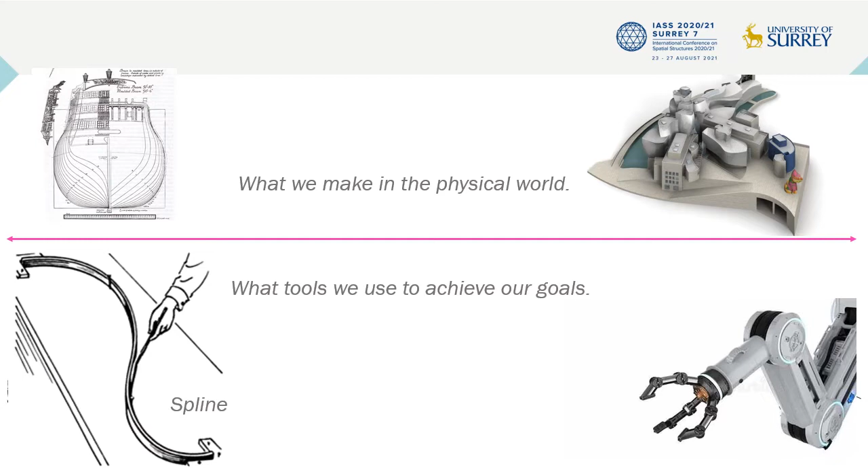I include shipbuilding because the tools shipbuilders used included a spline, a tool that had a significant impact on the invention of CAD systems and future automated tools. My timeline for building engineering begins in the mid-19th century, with Chicago claiming the world's first tall building. It had a modern steel frame, fireproofing, and elevators, all innovations from this period.

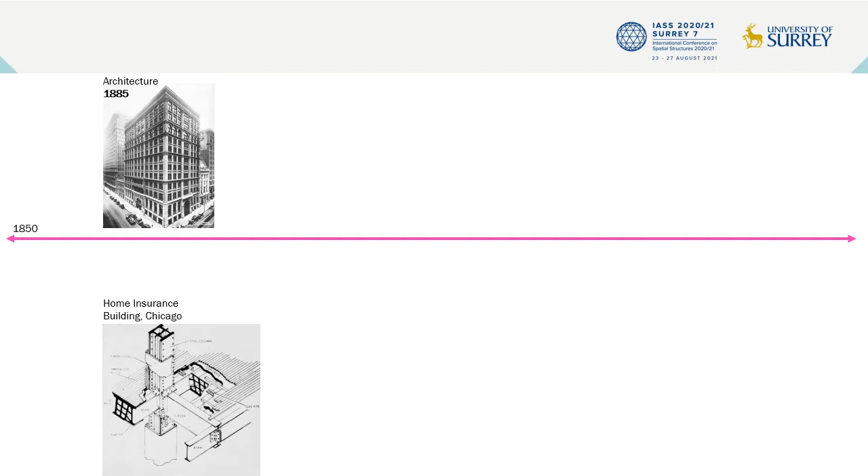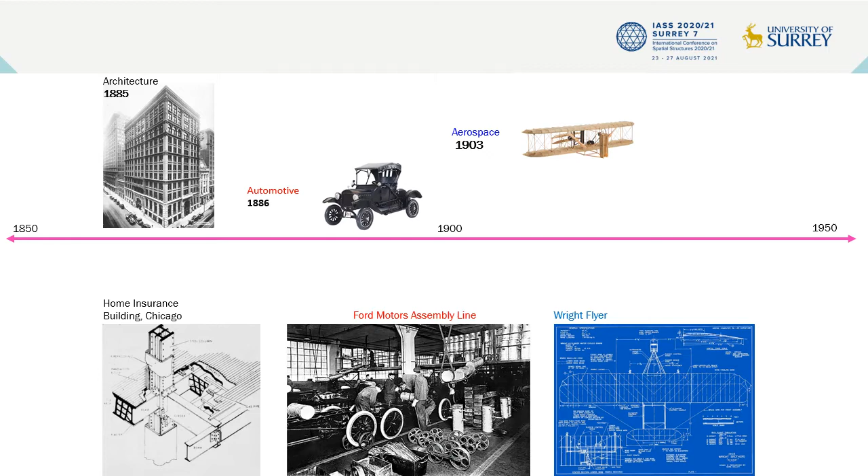Things got interesting in the engineering world as we entered the 20th century with the invention of automobiles and aeroplanes. Incredible innovation occurred over the first half of the century in architecture, automotive, and aerospace, while continuing to use hand drawings and calculations. The next 6 decades, from 1950 to 2010, is where there was tremendous innovation in computer-aided design for these fields, parallel with the development of semiconductors.

The origins of CAD systems in the 1950s begins in France with Paul de Casteljau and Pierre Bézier developing algorithms for the shipbuilder's spline and digitizing these in early computer programs. And Chuck Eastman at Carnegie Mellon predicts our BIM future in 1974 with his seminal GLIDE program. In 1992, Frank Gehry's Fish in Barcelona is the first BIM architectural structure. By 2010, we have extraordinary 3D tools like Revit, generative components, and Grasshopper.

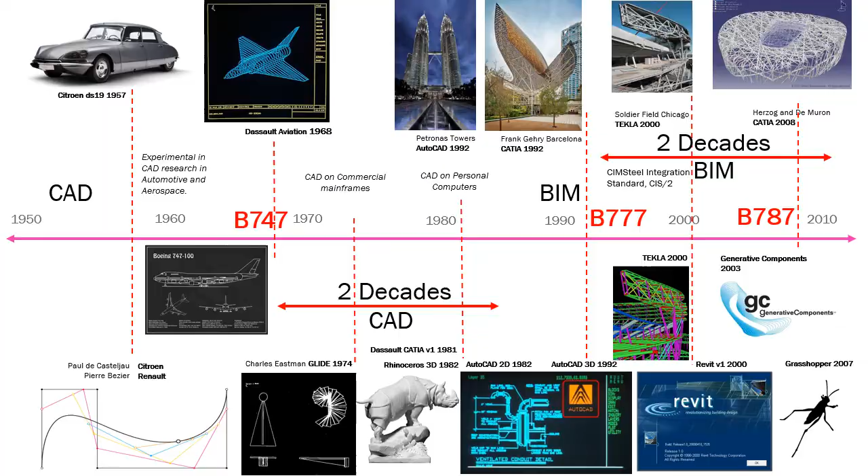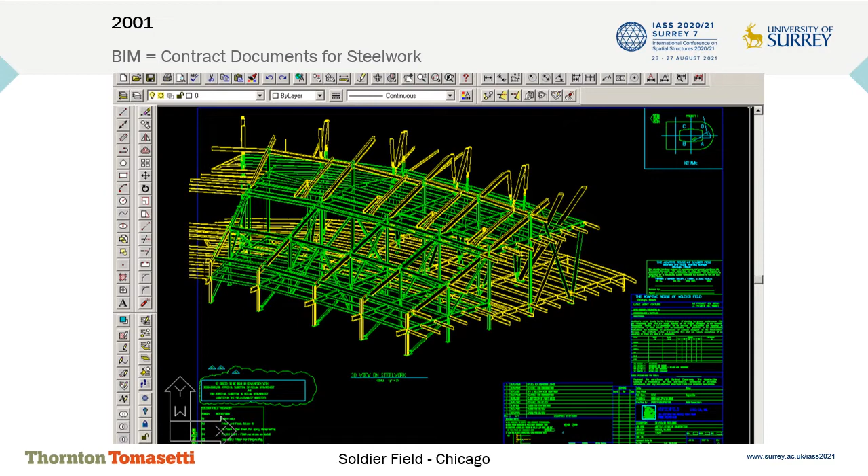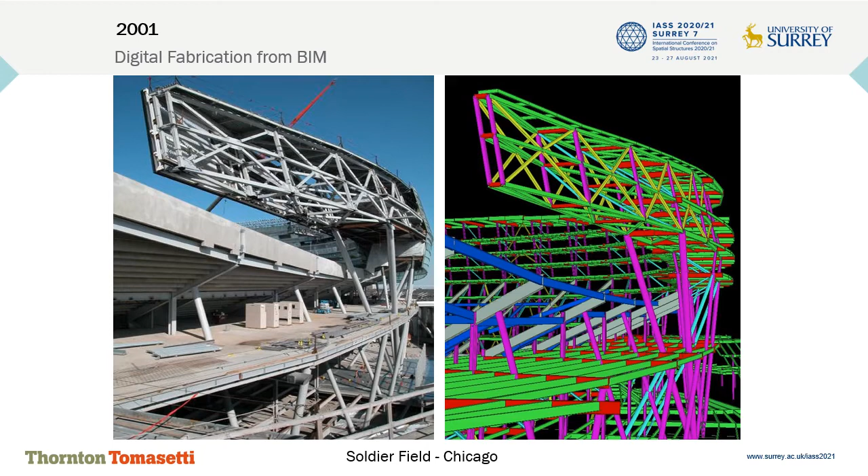Soldier Field in Chicago is our first use of BIM software in the design and delivery of a project. We utilized Tekla's XSteel software to model all of the steelwork in a BIM model, and it became the contract document for steelwork in the bidding, shop drawing, and construction phases of the project. There were many challenges, but the advantages of the direct flow of steel design information to digital fabrication and ease of steel erection outweighed the challenges.

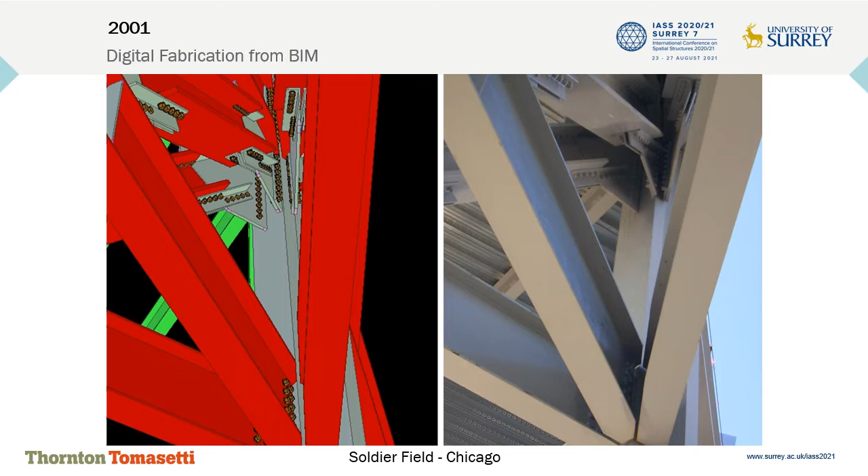With robots that cut and punch steel, even complex structures neatly fit together in the field. An added benefit was that the cladding was fabricated by Permasteelisa, who was experienced in cladding Frank Gehry's buildings. They used our Tekla model to carefully tailor the exterior enclosure to fit our structural frame.

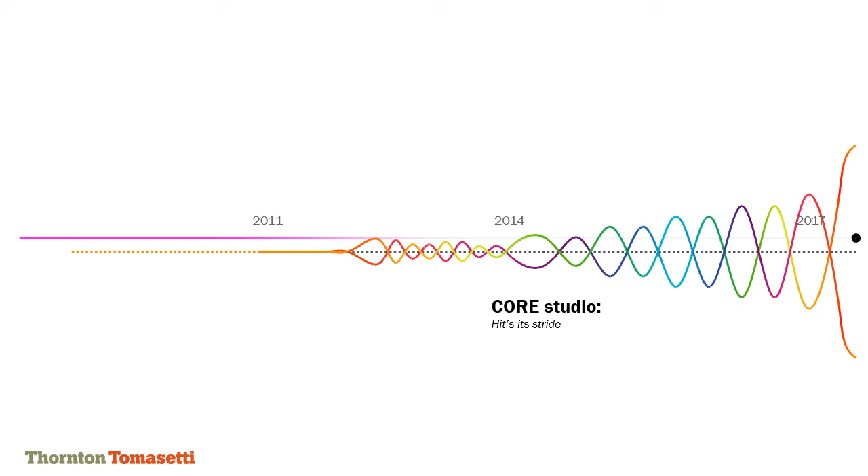So how did we get here? Core Studio is Thornton Tomasetti's in-house R&D team. We continued to use BIM software like Tekla and CATIA after Soldier Field with Barclays Center in New York, allowing further development of modeling and collaboration tools. Our advanced computational modeling team evolved into our Core Studio by 2014, developing tools to achieve our goals. Our Core Studio operates like a startup, oscillating between making tools and using them with project teams.

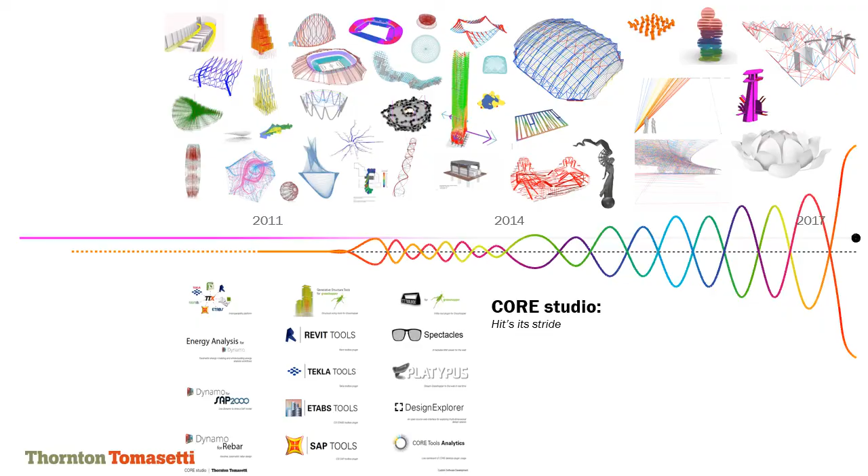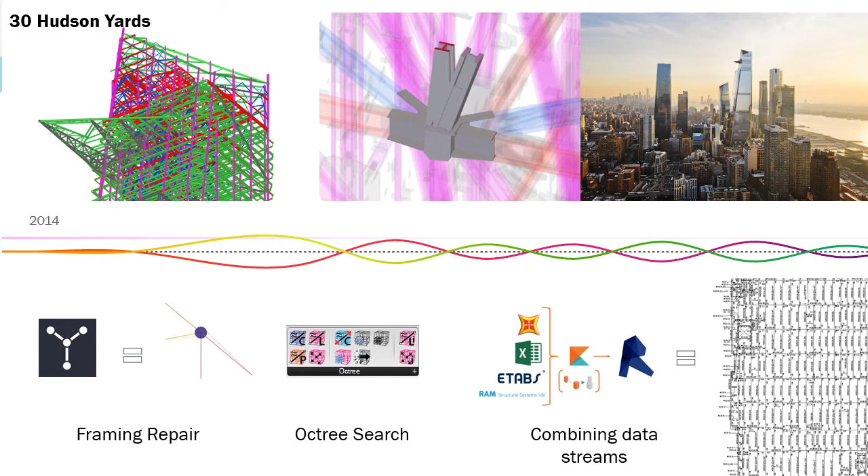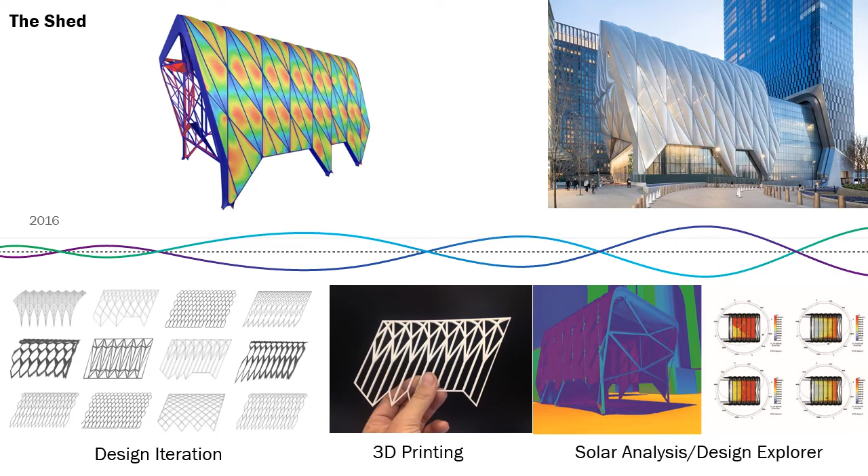There are many tools and many projects, but here are 2 examples of projects and their tools. We were structural engineers for 30 Hudson Yards, but we also delivered the structural steelwork with Tekla while improving workflows between our analysis software, Tekla, and the rest of the design and construction team. The Shed at Hudson Yards combined our structural and facade engineering teams with rapid design iteration and environmental analysis.

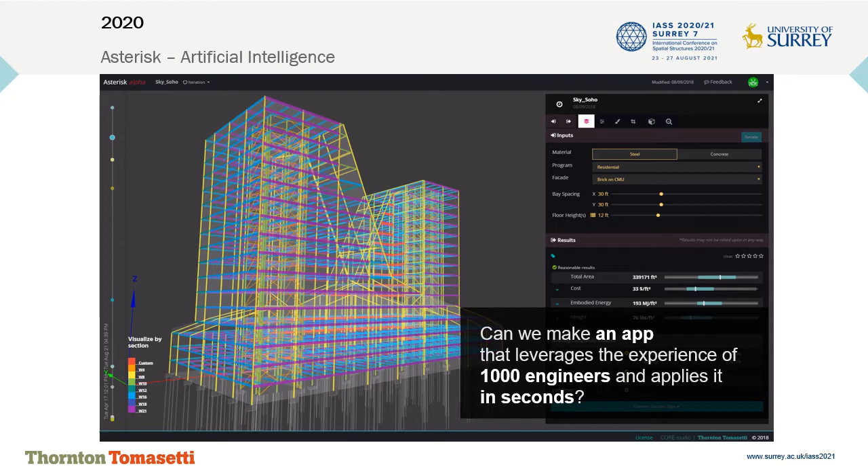And finally, where are we going? Here are 4 paths among many from our recent work that show promise: artificial intelligence, interoperability, the easy button, and cloud computing, and I will return to the Boeing 787. Asterisk is our artificial intelligence effort to capture what we have learned over the past few decades to leverage that knowledge in engineering future structures.

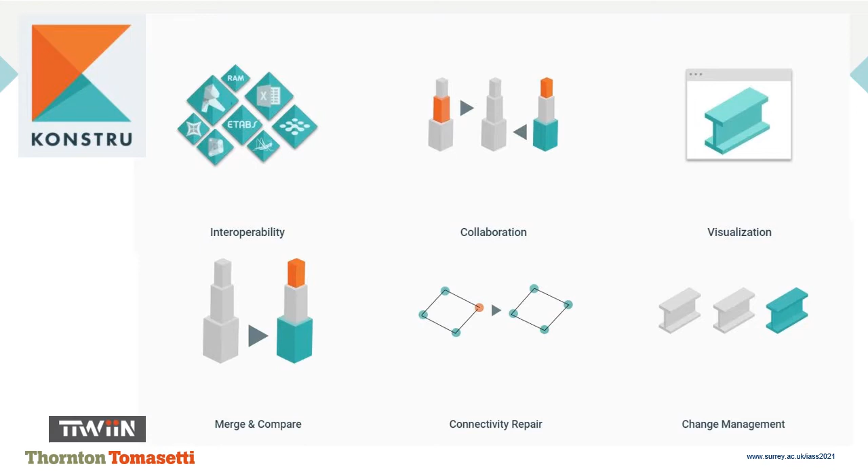Core Studio has also spun off software via TTWiiN, our technology accelerator, such as Konstru, our interoperability and collaboration software. And Swarm was spun off as well, a user-friendly interface for Grasshopper design and optimization. Swarm is really an app store for the design community. It connects designers who need easy-to-use tools with the super users who are building them. Swarm recently merged with ShapeDiver, a firm building Grasshopper tools focused on the product design industry.

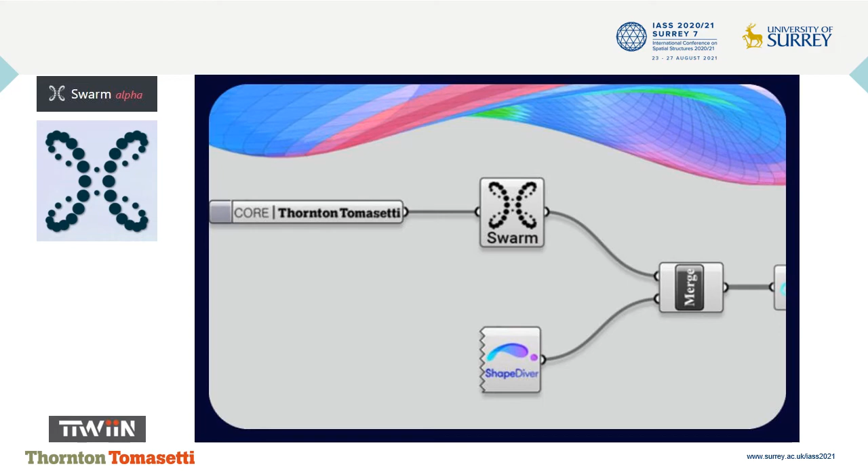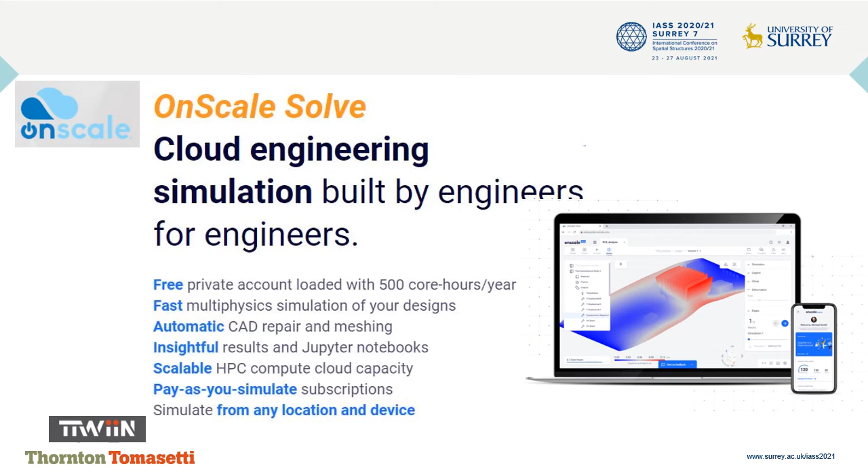This is a very interesting collaboration, as there is much our industry could learn from rapid prototyping, modular assembly, and supply chains. This also introduces my fourth path, cloud computing, as Swarm is really Grasshopper tools in the cloud, but OnScale is a very high-powered cloud engineering tool, scalable to solve very large, complex analysis problems. And OnScale is suitable for all industries, not just ours.

I return to the 787 to look at where we are going, considering our 2-decade lag per Chuck Eastman. Here are some paths that may be relevant to our building industry in the coming decade. The use of a single model throughout design and construction. Large chunks are design-built collaboratively. Extensive off-site prefabrication, material advances to improve performance, and the use of digital twins throughout the project lifecycle.